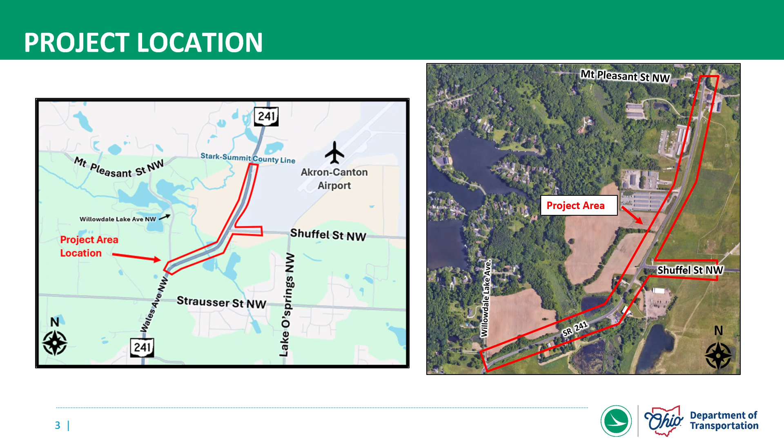First, let's discuss the prior plans and studies that have led us to the proposed transportation improvements. In August 2021, a Transportation Systems Management and Operations, or TSMO, study was completed for the State Route 241 corridor. This study analyzed the State Route 241 corridor as a whole, focusing on three key intersections: Strausser Street, Shuffel Street and Mount Pleasant Street. The results indicated that State Route 241 in Stark County may benefit from improvements, particularly in terms of capacity and safety. The study identified potential enhancements to improve overall traffic operations along the corridor.

An underwater inspection of the State Route 241 bridge over Nimisila Creek was completed in 2021. Findings from this inspection revealed structure deterioration and that the channel beneath the structure has aggraded, meaning sediment buildup is restricting the open area underneath the bridge and reducing its hydraulic capacity.

More recently, in August 2023, a drainage study was conducted in proximity of the State Route 241 bridge over Nimisila Creek. This study identified the need to replace deteriorated culverts and raise the profile of State Route 241 in proximity of the bridge, and concluded that the existing bridge over Nimisila Creek should be replaced with a new 30-foot span bridge to improve drainage and hydraulic capacity. These studies have provided valuable insights that have shaped proposed improvements. Later in the presentation, we'll take a closer look at what those improvements include.

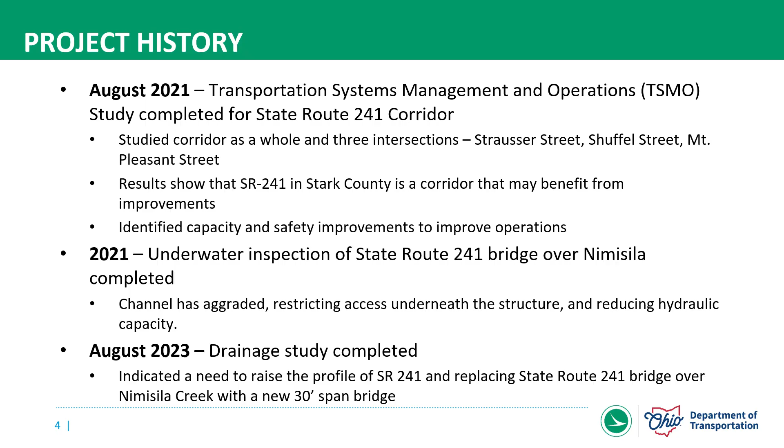Since completing these studies, ODOT has begun conceptual design for the proposed improvements and has developed informational materials to gather public feedback before finalizing the plans. In June of this year, a meeting was held on-site with the U.S. Army Corps of Engineers to discuss flooding reduction solutions. We are now seeking feedback on these improvements before advancing the design further and moving into right-of-way acquisition and construction.

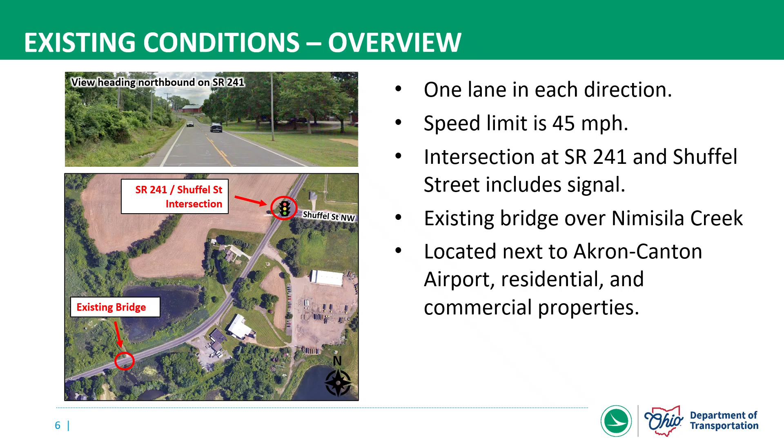In proximity of the project, State Route 241 consists of one through lane in each direction. The posted speed limit is 45 miles per hour. There is one signalized intersection within the project limits, State Route 241 and Shuffel Street. The State Route 241 bridge spanning Nimisila is located approximately 0.23 miles southwest of the intersection. Adjacent properties include the Akron-Canton Airport, residential and commercial properties.

The intersection of State Route 241 and Shuffel Street is one area of focus in this project. Currently, the intersection operates as a full movement intersection, meaning all turning movements are allowed. For southbound State Route 241 traffic, a protected left turn signal is in place to help manage turning movements. There are also two driveways located near the intersection. During peak hours, congestion is a common issue at this location, impacting overall travel efficiency.

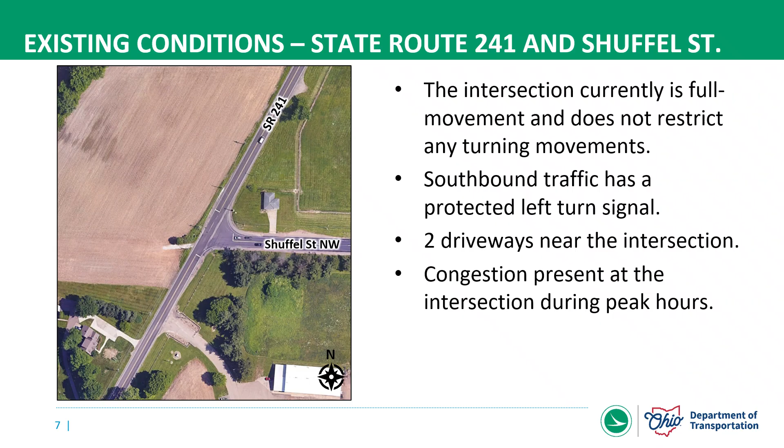Slightly southwest of the intersection, a bridge carries State Route 241 over Nimisila Creek. South of the bridge, the ditch along the west side of State Route 241 is meandering, and there are multiple areas where the ditch banks have eroded, requiring frequent shoulder pavement repairs. Moreover, a cross culvert near Willowdale Lake Avenue Northwest and multiple drive culverts along the ditch need maintenance attention.

The State Route 241 bridge spanning Nimisila Creek was constructed in 1947, rehabilitated in 1995, and additional maintenance was performed in 2014. As mentioned, an underwater inspection noted that sediment deposition has raised the inlet and outlet channels, reducing hydraulic capacity of the structure. During heavy rainfall events, stream flow overtops the structure and surrounding pavement, requiring closure of the roadway.

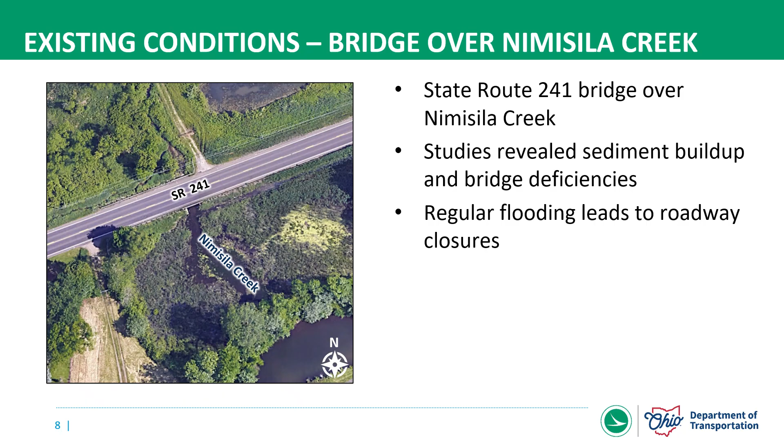ODOT has identified two major needs to address within the project area. The first is to improve safety at the State Route 241 and Shuffel Street intersection. Safety is a primary concern for all ODOT projects, and the Shuffel Street intersection has a high crash rate, which we'll discuss shortly. The second need is the bridge over Nimisila Creek and the roadway profile to improve drainage and overall facility deficiencies.

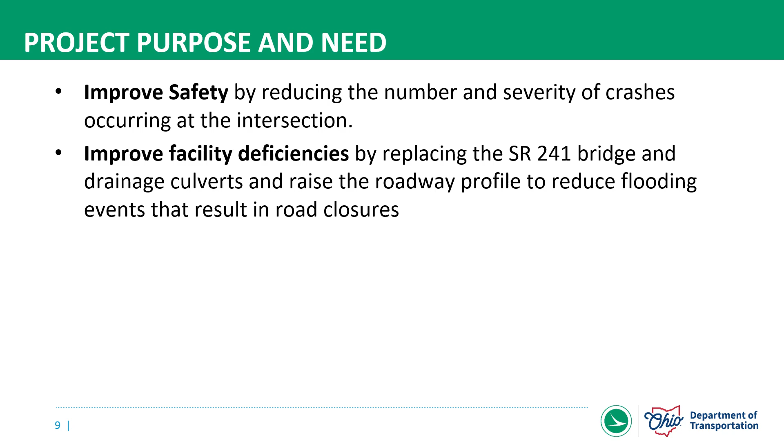Let's take a closer look at the safety issues at the intersection of State Route 241 and Shuffel Street. Between 2017 and 2024, there were 63 crashes at this intersection. On average, about 8 crashes occurred each year, with 9 crashes resulting in minor injuries, 7 possibly resulting in injuries, and 47 resulting in property damage with no injury.

This intersection has seen a high number of rear-end crashes, a total of 32 over the 8-year study, or 51%. Other crash types included 11 left turns (17%), 7 backing (11%), 6 fixed objects (10%), 4 side swipes (6%), and 2 right turns (3%).

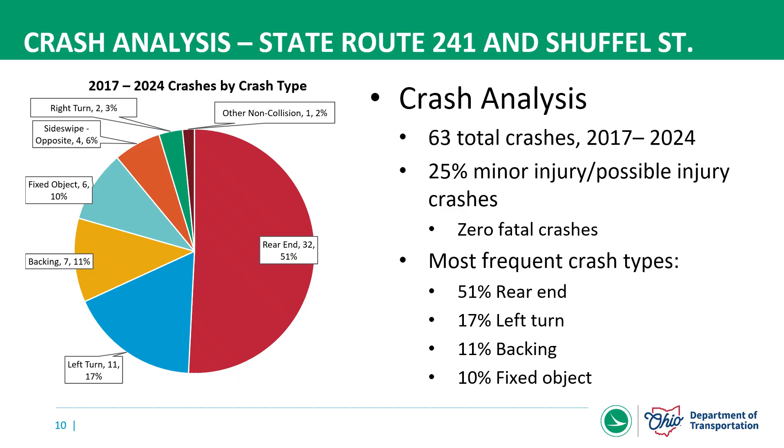Evidence of off-tracking indicates there are geometric issues and trucks are having difficulty navigating the intersection. Cars avoiding semi-trucks experiencing navigational issues, operator impairment, and failure to yield are some of the probable causes for the other crash types.

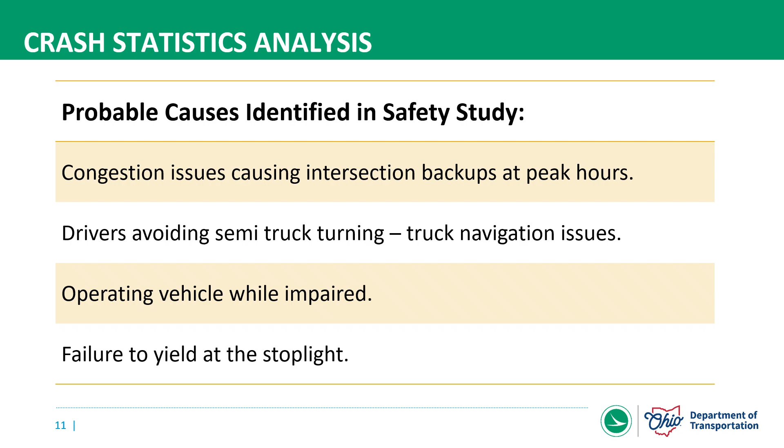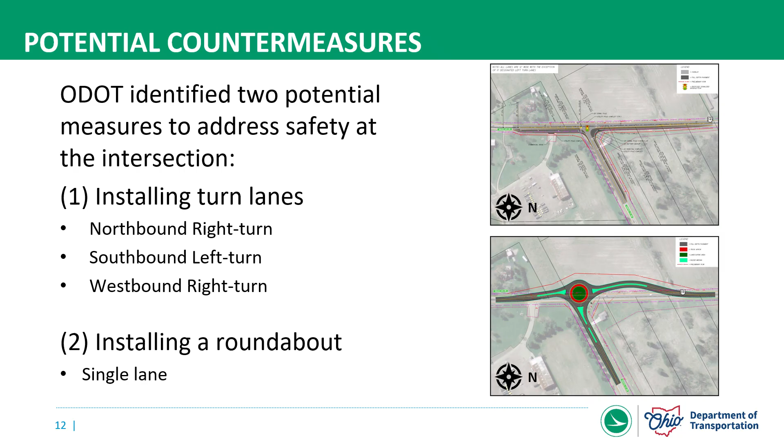Two potential solutions were identified to improve the safety and congestion issues. The first option was to construct new dedicated turn lanes: a dedicated northbound turn lane, dedicated southbound left turn lane, and dedicated westbound right turn lane. The second option would install a single-lane roundabout at the intersection.

After further detailed analysis, it was found that implementing turn lanes may actually increase congestion at the intersection, as it takes longer for the signal to complete a full cycle, therefore increasing traffic and providing more opportunities for rear-end crashes. A roundabout will allow traffic to continuously flow at a reduced speed, reducing congestion and removing many potential conflict points that occur in a typical intersection.

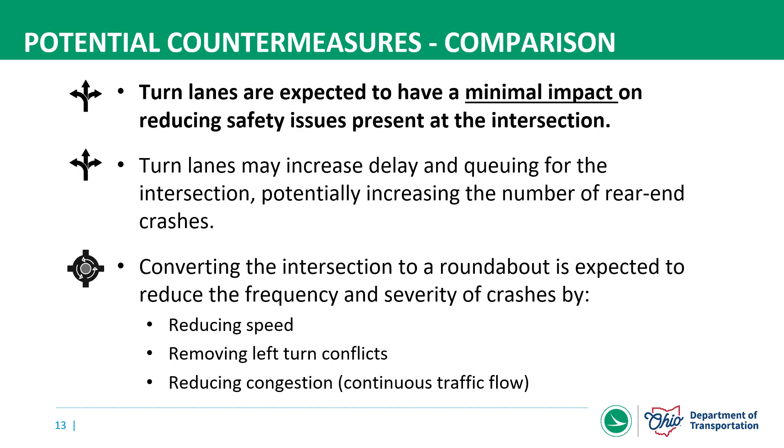Due to the safety and operational advantages of the single-lane roundabout, it was selected as the best countermeasure to improve safety and reduce congestion.

After advancing the roundabout for further study, two roundabout alternatives or layouts were evaluated to meet design criteria while minimizing impacts. Roundabout Alternative 1 is located further west of the existing intersection. This placement avoids permanent right-of-way impacts on the east side of State Route 241 while allowing for offline construction of the roundabout. This design includes an 18-foot roadway with a 12-foot truck apron.

Roundabout Alternative 2 is also positioned west of the existing intersection, but is closer to the center of the existing intersection than Alternative 1. This option avoids permanent impacts beyond the existing right-of-way east of Shuffel Street while minimizing right-of-way impacts on the west side of State Route 241. The design for Alternative 2 features a 16-foot roadway and a 13-foot truck apron.

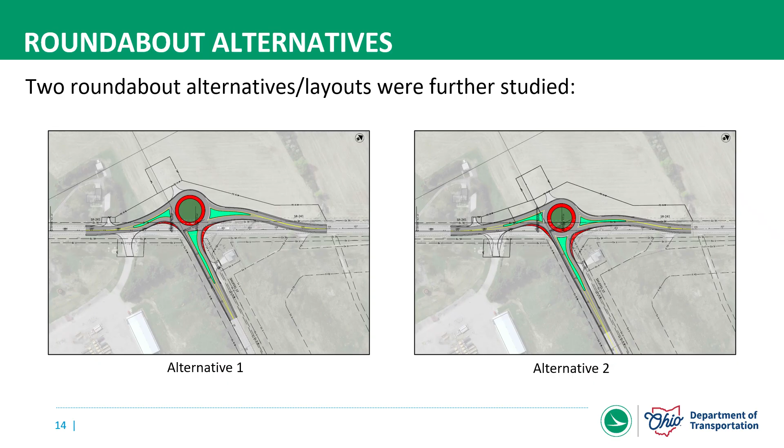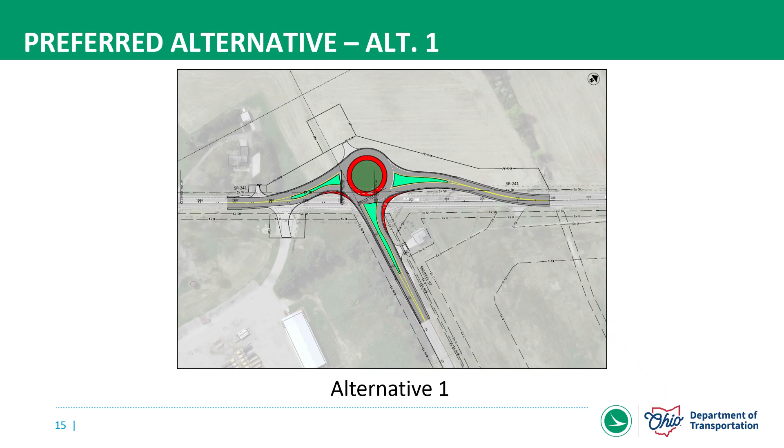Both alternatives have comparable impacts and costs. Alternative 1, the roundabout shifted more to the west, was selected as the preferred alternative due to the constructability and reduced impacts to the traveling public compared to Alternative 2.

One of the key benefits of roundabouts is that they have fewer conflict points compared to traditional intersections. This means there are fewer opportunities for severe crashes, such as T-bone or head-on collisions. Because of this, roundabouts are expected to reduce serious injury and fatal crashes by up to 75% compared to traditional signalized intersections. This significant improvement in safety makes them a preferred choice for many roadway projects.

In addition to improving safety, roundabouts also help enhance traffic flow, slow vehicle speeds, and provide a natural traffic calming effect. By keeping vehicles moving efficiently at lower speeds, roundabouts reduce congestion while improving overall travel conditions. These benefits make roundabouts a valuable tool for improving roadway safety and operations.

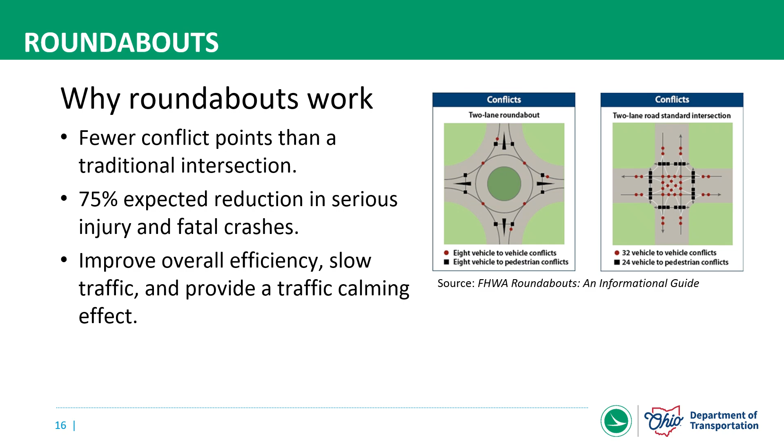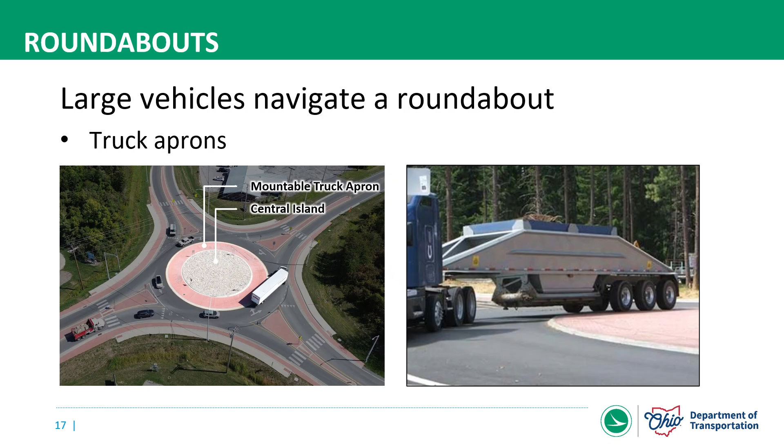Large vehicles can navigate the roundabout by using the mountable truck apron. This apron is the area between the central island and the travel lanes, specifically designed to accommodate larger vehicles while remaining separate from regular passenger vehicle use. To distinguish it from the main roadway, the truck apron is typically made of a different material or color, providing a visual cue for drivers.

Roundabouts are becoming increasingly common solutions to improving safety in Ohio.

Between 2002 and 2014, the State Route 619 and McCallum Road intersection averaged over 5 crashes per year, with 86% being angle crashes and 35% resulting in injury. Despite stop signs, warning beacons, and signage improvements, drivers on McCallum Road continued failing to yield to State Route 619 traffic. Identified as a high-priority safety concern, ODOT conducted a study and determined a roundabout was the best solution. Completed in 2021 for $1.8 million, the roundabout now has an average of just over 1 crash per year, a reduction of 72%, and there have been no dangerous angle crashes.

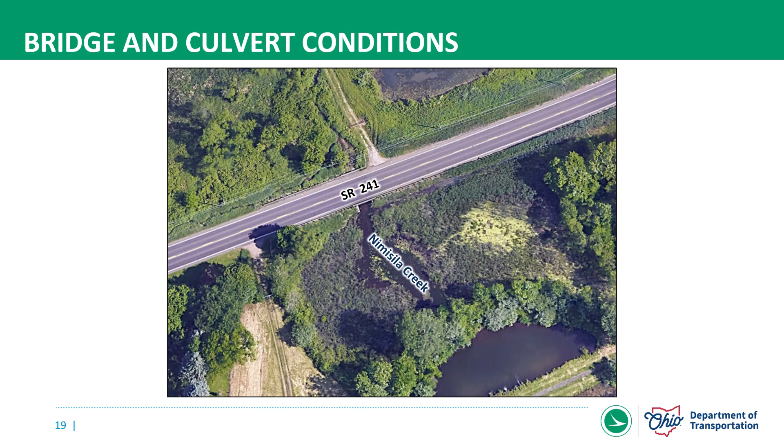Additional bridge and culvert work south of the intersection will address structural deficiencies and flooding overtopping State Route 241. Let's dive deeper into the current bridge and culvert conditions.

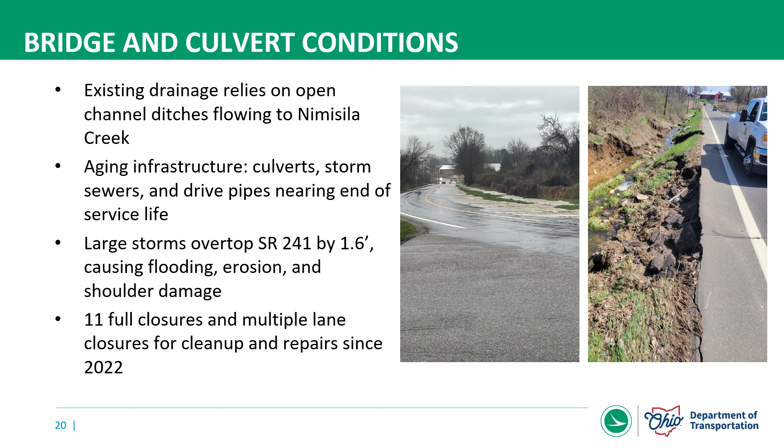The existing State Route 241 corridor relies on open channel ditches for drainage into Nimisila Creek. Much of the current infrastructure, culverts, storm sewers, and drive pipes, is aging and nearing the end of its service life. During major storms, State Route 241 is overtopped by up to 1.6 feet near Nimisila Creek, causing flooding, erosion, and damage to the roadway shoulder. Since 2022, the route has been closed 11 times due to flooding, with additional lane closures for cleanup and repairs.

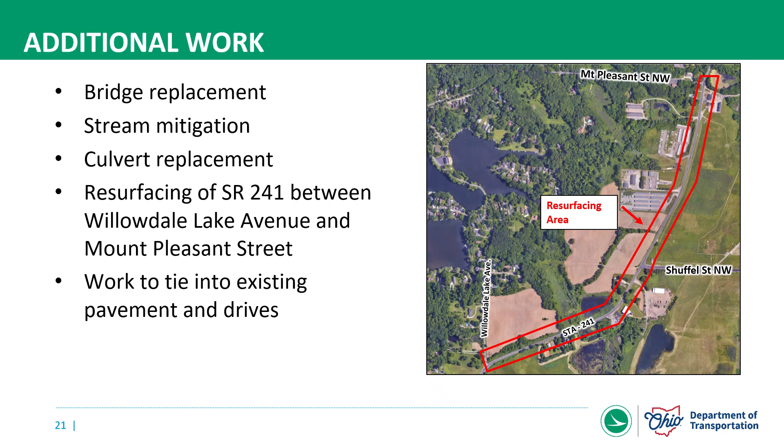Additional work to address these issues includes replacing the existing bridge and culverts, stream mitigation, roadway profile adjustments, and resurfacing of State Route 241 between Willowdale Lake Avenue and Mount Pleasant Street, and work to tie into existing pavement and access drives.

Environmental studies are ongoing, however there are some anticipated impacts. Impacts to Nimisila Creek will require waterway permits, and additional work, such as mussel relocation, prior to in-water work may be needed. Tree clearing restrictions will likely be required to protect suitable wooded bat habitat during the summer roosting months. The bridge set to be replaced by this project was built in 1947, but it is not eligible for consideration for the National Register of Historic Places.

However, 2 barn structures were found eligible for the National Register. The project will have no effect on the historic boundaries and won't alter the character-defining features of the historic barns, and the project is considered to have no adverse effect on the historic resources. The project will not result in any substantive impacts to environmental resources.

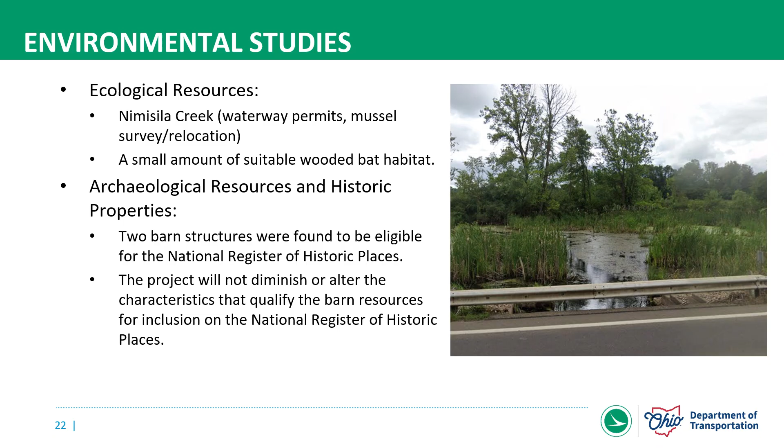Construction is expected to occur in 2 main phases to minimize impacts. Northbound and southbound detours will be utilized during each phase. Phase 1 begins in October 2026 with the closure of State Route 241 between Willowdale Lake Avenue and Shuffel Street. Phase 2 starts on or after April 1st, 2027, closing Shuffel Street between State Route 241 and Lake O'Springs for up to 60 days.

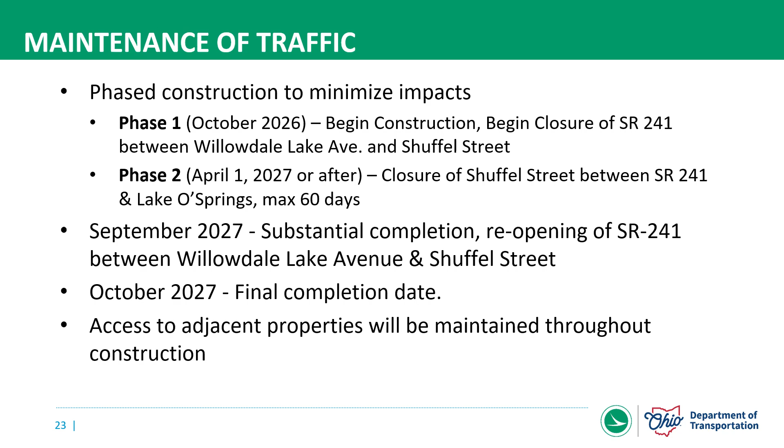By September 2027, State Route 241 will reopen between Willowdale Lake Avenue and Shuffel Street, with final completion scheduled for October 2027. Throughout construction, access to adjacent properties will be maintained.

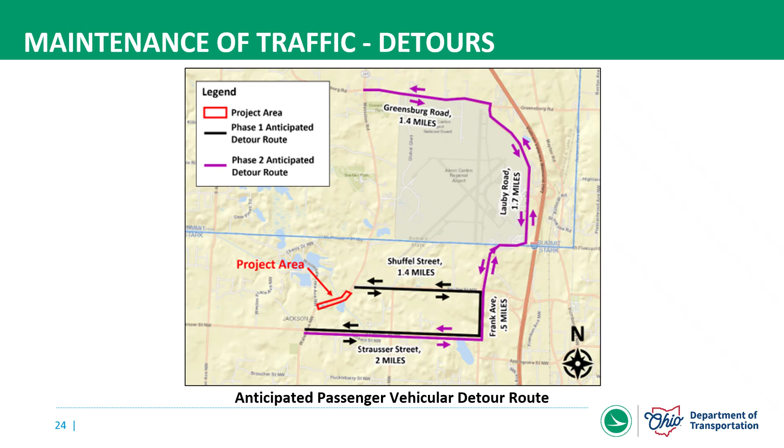It is anticipated that temporary and permanent right-of-way will be needed for the project. If right-of-way acquisition is necessary from your property, a real estate representative will contact you directly to discuss the right-of-way needs, the acquisition process, and your rights under that process. Utility impacts are also expected.

The proposed project, including engineering, environmental work, right-of-way, and construction, is estimated to cost approximately $9.1 million. Both state and federal funding will be used for the project.

This project is currently in the environmental engineering phase of the project development process. Stage 1 design plans have been drafted and are in the process of being approved. Environmental studies are underway and right-of-way plans are being developed. At this time, ODOT is seeking public and stakeholder involvement on the proposed project.

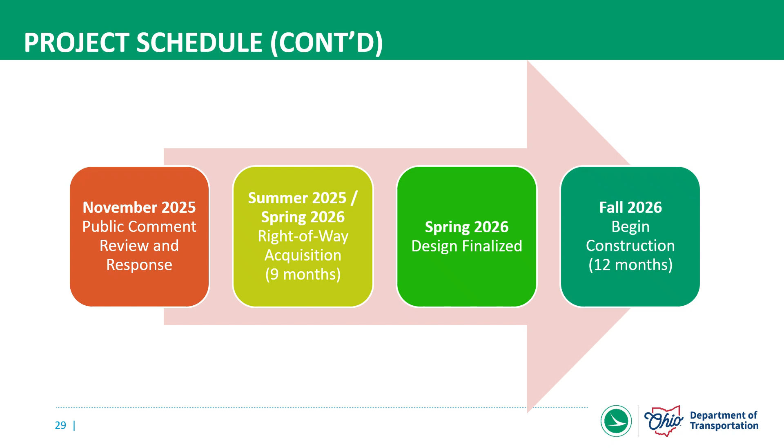The public comment period will close on November 9, 2025. The team will then review all comments received, issue responses, and make any needed changes to the design. Right-of-way acquisition will occur from summer of 2025 to spring of 2026. The design will be finalized in the spring of 2026, and construction is tentatively scheduled to begin in the fall of 2026 and will last approximately 12 months.